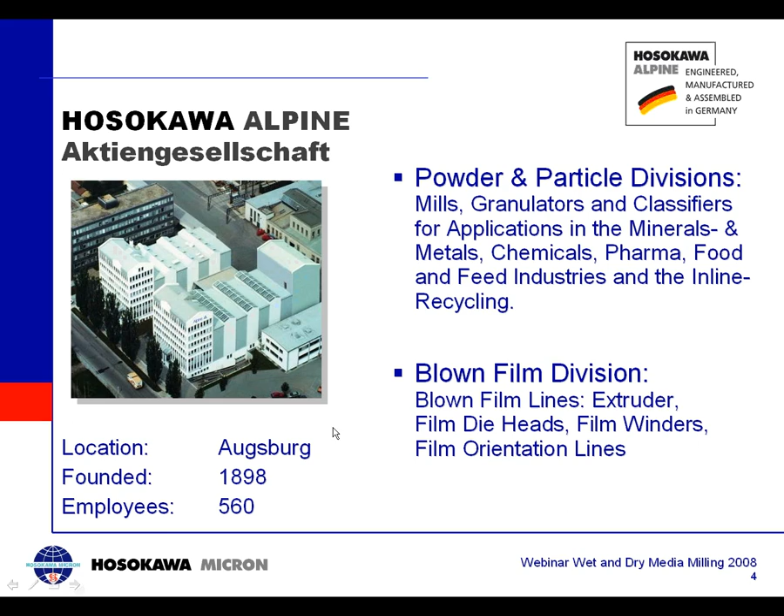Okay, we have it. So during my talk, I will speak about, first of all, the fundamentals of media milling, to give you some theoretical background. I will also talk about the basic types of the media mills. Then I go into the technology of dry and wet media mills. We give you some information about possible applications and the plant technology. And finally, some information about an interesting field, which is submicron grinding with wet and dry media mills.

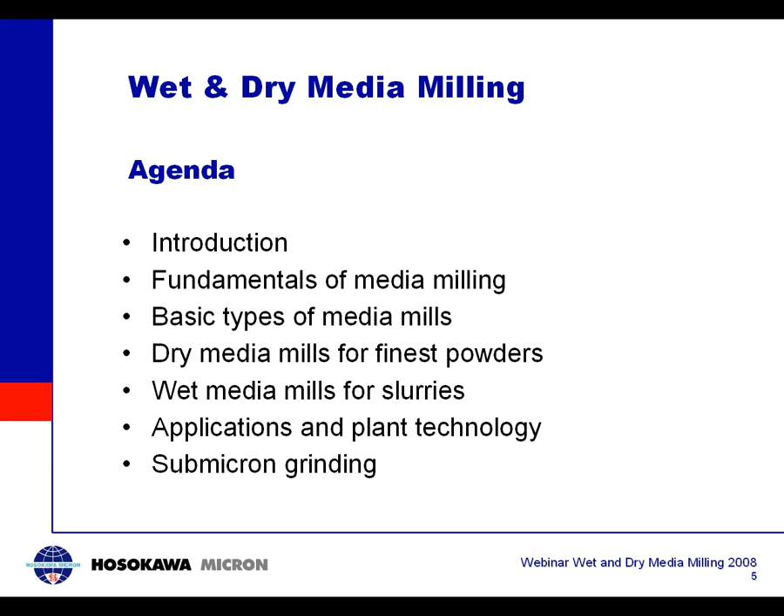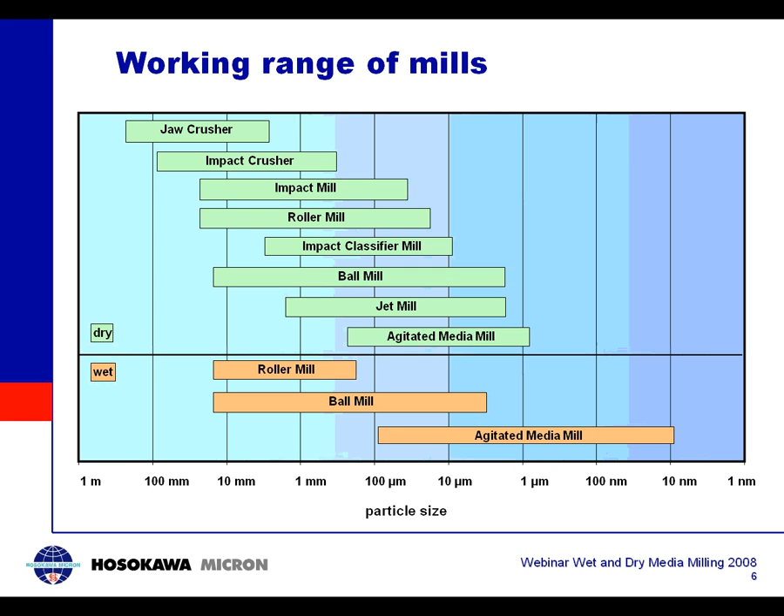The fundamentals of media milling. This is easy to explain, and on the next slide you can see a very simple mill. It's a very early model, about 20,000 years old, but it's a very suitable machine to explain the mechanism of media grinding. You can see here the basic parts of a media mill, which is the grinding medium.

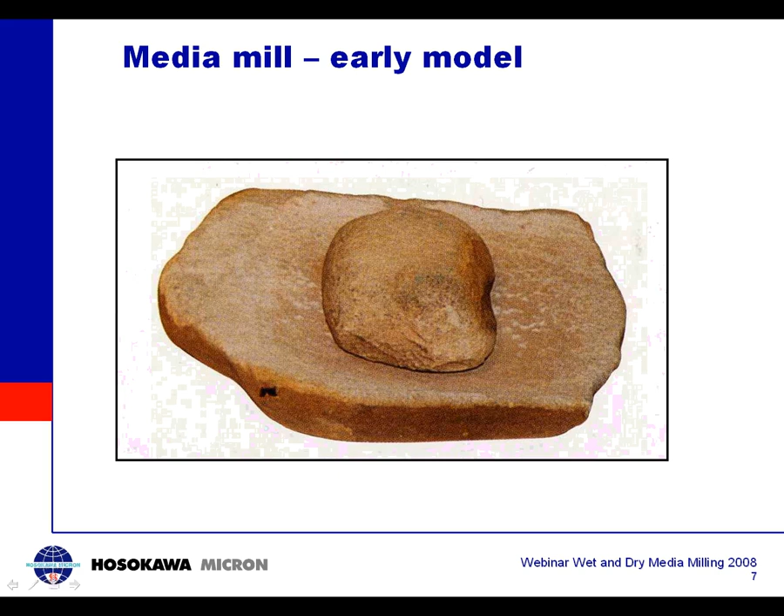It is one only in this mill, and we have a part of the mill, a kind of a support, and in between there is the powder which we want to grind. With this mill, it is very easy to explain the basic grinding mechanisms which can occur in a media mill.

If you take the stone in your hand and you knock on the support, you create a kind of impact on the particles. You can also take the stone and roll it with pressure, and you have a pressure stress on the particles, or you rub the stone on the support, and then you get a shear stressing of the particles. These are the basic types of grinding mechanisms which grinding media can bring over to particles.

And this is the same in modern mills. I think the next slide will show what the difference is and what the similarities are.

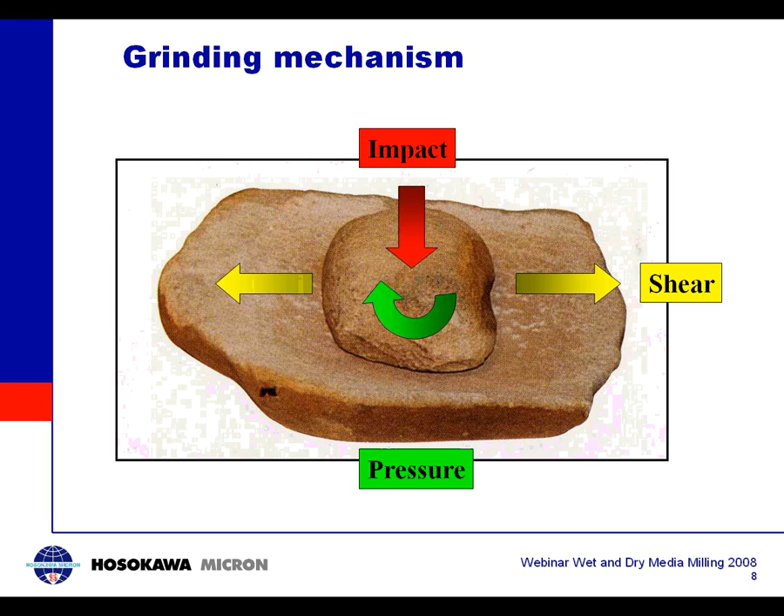We can roll the balls and create pressure, or we can shear the particles between two passing grinding beads. So this is so far the same as in the old mill. However, in the old mill you can take the stone and decide by yourself which grinding mechanism you want to have. This is actually not possible in a modern grinding mill because you have thousands or millions of grinding beads inside, so there will always be a mixture of all these grinding mechanisms in the mill.

There is a certain chance to influence that by setting the parameters of the mill, like the rotor speed or the filling ratio of grinding beads or the material or the size of the grinding beads. But you can only create a tendency to get more impact or more shear on the particles, but you cannot decide to make a single shear stressing in a mill with such a high number of grinding beads.

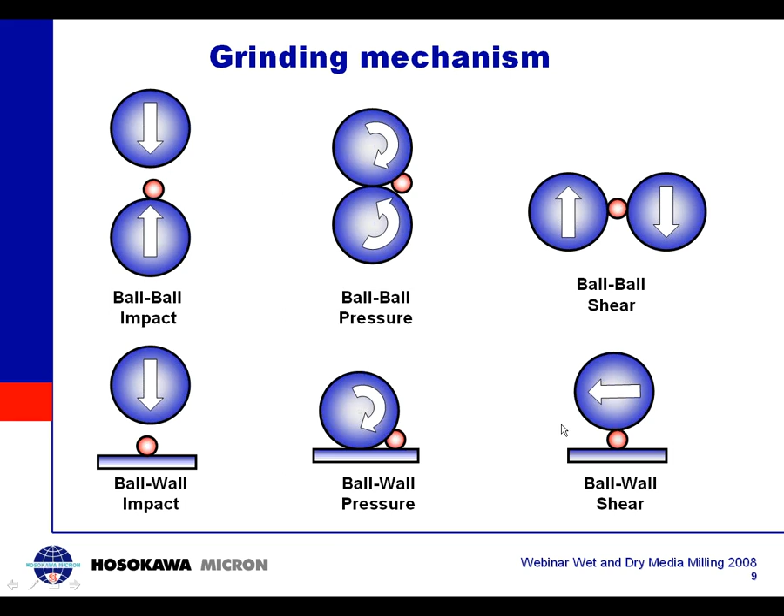First of all, we have a tumbling ball mill, which is a rotating drum in horizontal axis, and the grinding beads are accelerated by the rotation of the drum and falling back, and the grinding energy input is done by the gravity, which is affecting the grinding beads.

If you need more energy input into the mill, you cannot count on the gravity. You have to look for external forces which you can bring into the grinding media, and this can be done in different ways. One is the agitated media mill with a rotor inside, which is rotating and bringing motion into the grinding media filling.

You can also do this by a planetary mill, which has a certain double rotation of the mill and the grinding chambers themselves, and you can simulate a tumbling ball mill grinding under centrifugal forces.

Other types of mills are vibration mills, where the grinding body is moving with a high frequency to transfer the energy into the grinding beads, or centrifugal mills, which are doing basically the same but with a lower frequency to create a kind of a rolling grinding media filling inside.

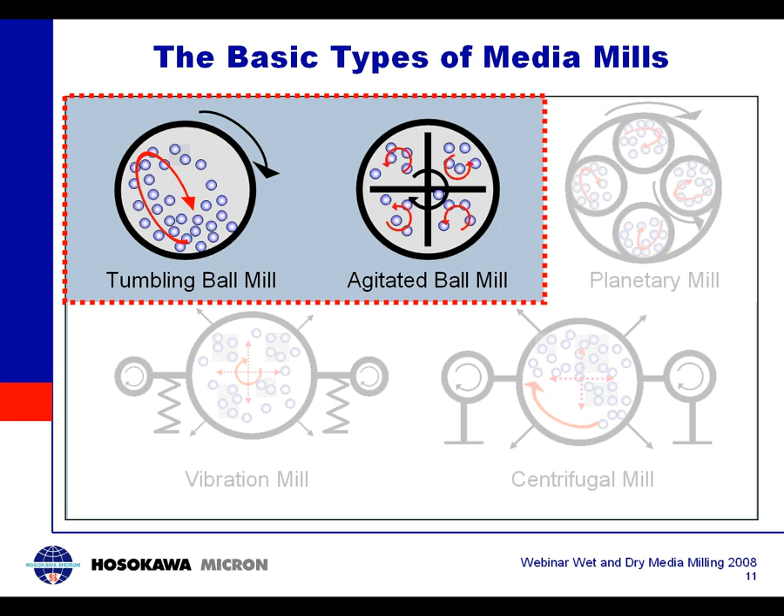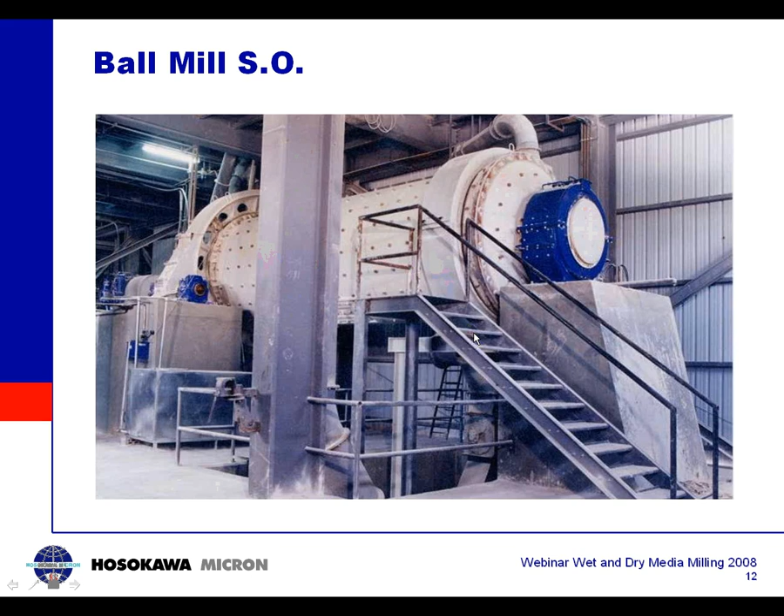These mills are usually operated continuously, but not as a single mill with one pass through the mill, which is definitely not sufficient for very fine grinding. We always have a system with a grinding circuit comprising the mill and the classifiers. I can show you on this flow sheet how this can work.

This is a typical ball mill classifier plant, which we always apply in the minerals industry. The feed material comes from a silo here and is charged into the mill by a dosing unit and passes through the mill in this direction here. The mill contains grinding beads made of steel or ceramic, and the typical size range of the beads is 10 to 60 millimeters. After passing the mill, the material is discharged and conveyed to the classifier.

In this case, we have a typical arrangement with two classifiers, so we can split the material to a coarser classifier, which makes one end product, or to a very fine classifier to make a second product, which is collected in the filter. So this is a plant that can produce in parallel two different products. The coarse fractions from the classifiers are being recycled to the mill and going back into the circuit again.

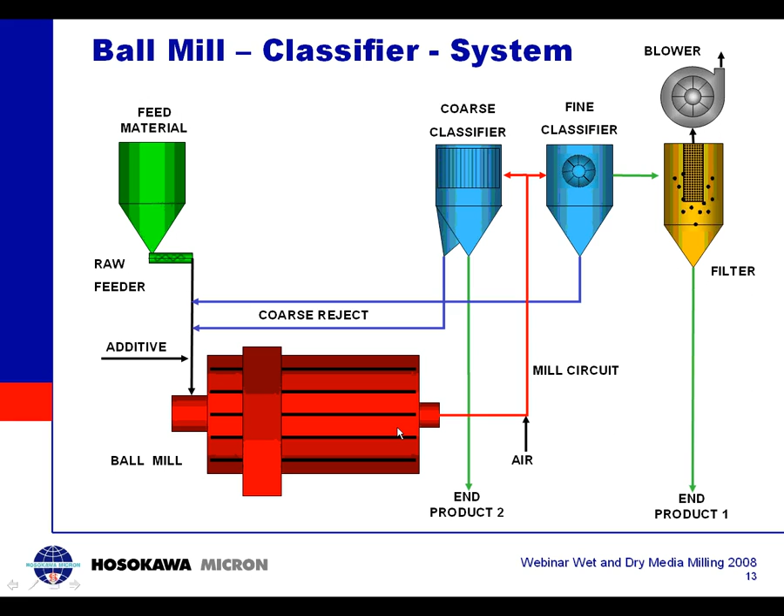Alternatively to the tumbling ball mill, we can also choose agitated media mills to bring higher energy into the grinding chamber. This is a type of mill we are supplying, called ATR. It's a vertical cylindrical grinding body with a vertical shaft and rotating elements. The mill is filled with grinding beads up to the top, and the rotor moves slowly at about 2 to 3 meters per second.

Typical mill volumes are in the range of 80 to 2,000 liters, with power installed reaching up to 315 kilowatt. So the power input we can create with such a mill, 180 kilowatt per cubic meter mill volume, is significantly higher than a tumbling ball mill has.

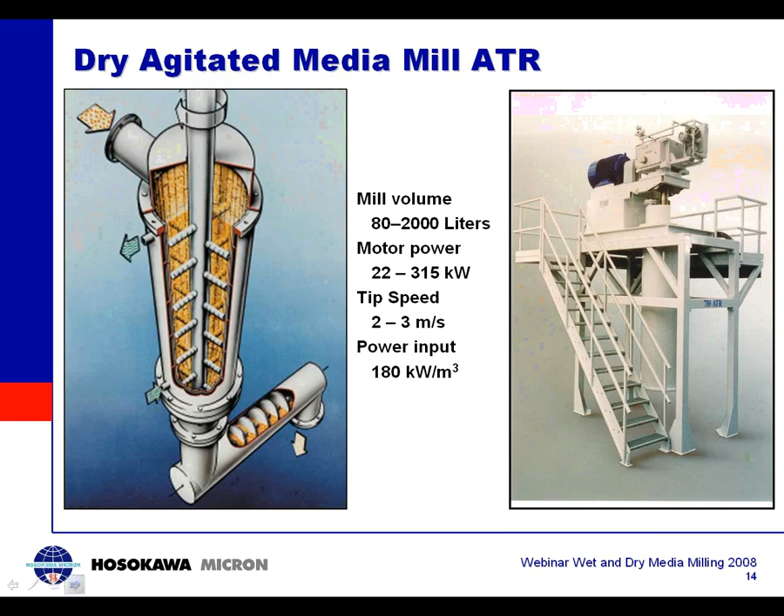These mills are also operated in a closed circuit system with classifiers. I can show you this on the flow sheet. In the center you can see the media mill. The grinding beads and product are fed from the top into the mill, both passing through, being ground, and then discharged by a conveyor screw out from the mill. Beads and product are separated on a vibrating screen. The beads are collected in a special hopper and recirculated into the mill by a bucket elevator. The product passing the screen goes on into a classifier, and the fine product collected in a filter is the end product of the plant, while the coarse fraction is recycled via the bucket elevator back into the mill. So this is also a closed grinding circuit with mill and classifier.

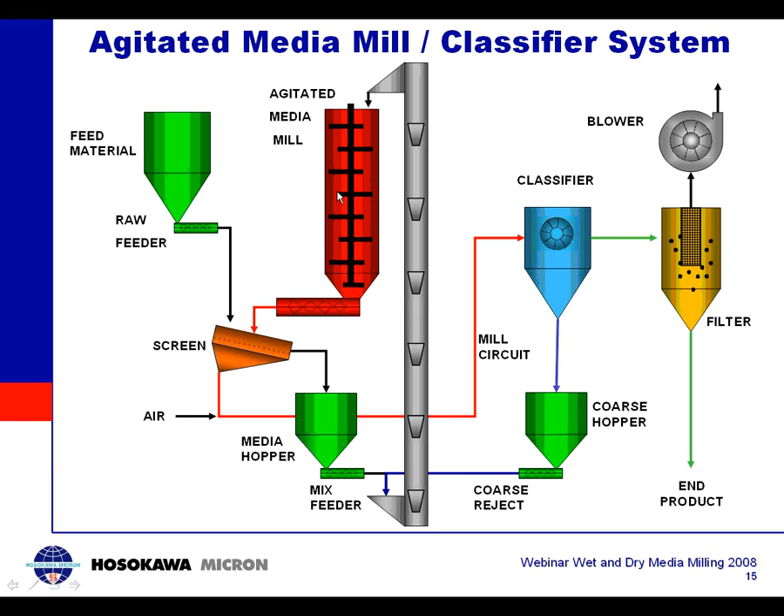To create such an ultrafine grinding system, it is important to have a mill with high energy input that can be operated with small grinding media. However, it is also very important to have an appropriate classifier for the typical end products you want to obtain with this plant. This slide shows a selection of classifiers which we can offer together with such plants for the grinding circuit.

On the left side you see a circuit air classifier, the Ventoplex, dedicated to classifications in the range of 32 to 300 microns, so more on the coarse range of products. We have a spiral flow classifier, ASP Stratoplex, which can do a little finer, designed for high capacities and low pressure loss, so very economic classification. And we have very fine classifiers, the ATP Turboplex classifier or the TTC Turbo Twin, with a special wheel geometry that can go down to 5 or even 2 micron separation cut.

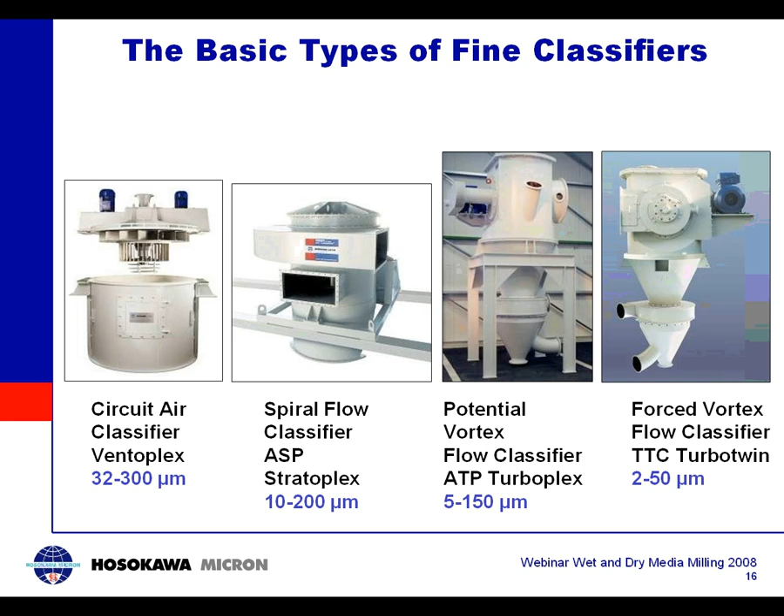Some details of these classifiers can be seen in the next slide. On the left side you see the Turboplex classifier in a special arrangement with multiple wheels, in this case 6 classifier wheels in one classifier housing. With this classifier it is possible to make very fine separations with high capacities. This can be improved further with a new type of wheel, which we call the NG new generation wheel. It has a special blade geometry, creating a forced vortex separation inside, and this classifier wheel can go down to about 3 micron cut size, or in the TTC wheel shown below, down to about 2 micron separation.

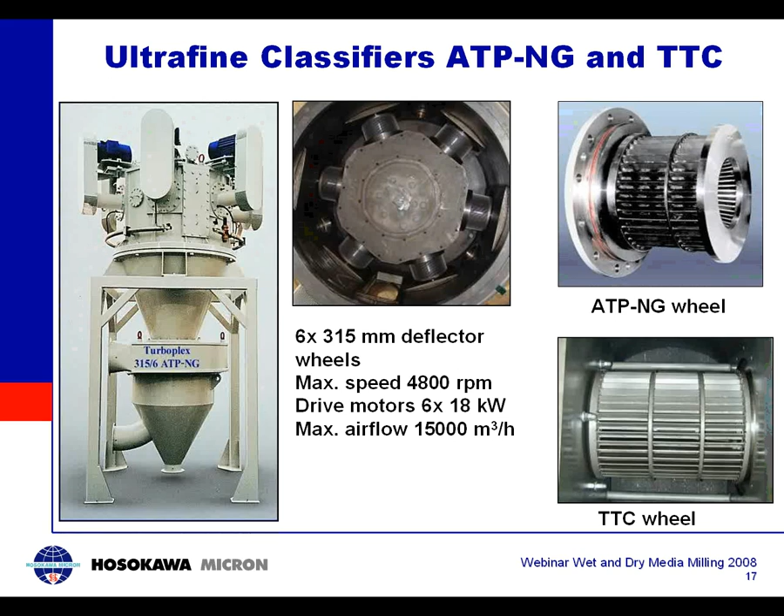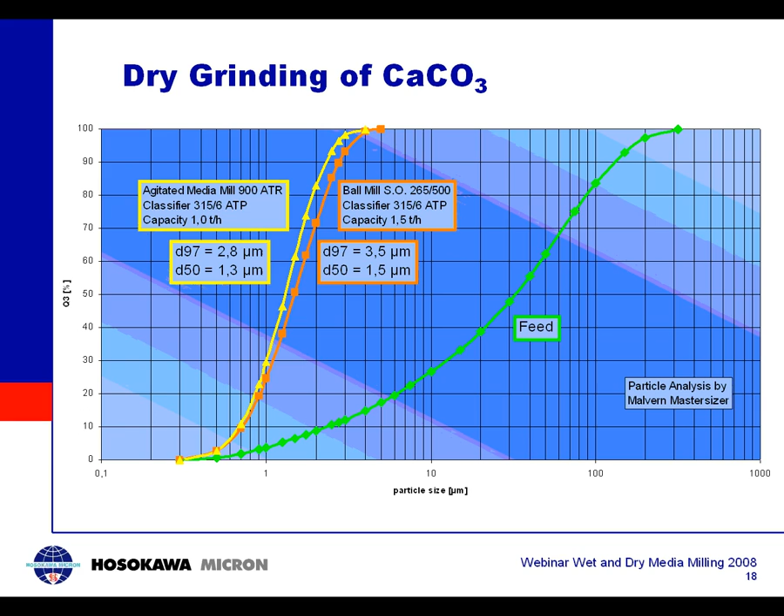The result of such a plant can be seen in the following graph. Green is the feed material, orange is the result of a ball mill classifier system, and the yellow curve shows a product coming from the vertical media mill ATR. What you can see is that we reach the expected grinding limit of about 1 micron D50, and even with a high intensity mill, the vertical media mill, we cannot go significantly finer than the ball mill. So it seems there is a limit of grinding, and I will come back to this problem later when I speak about stabilization of the particles.

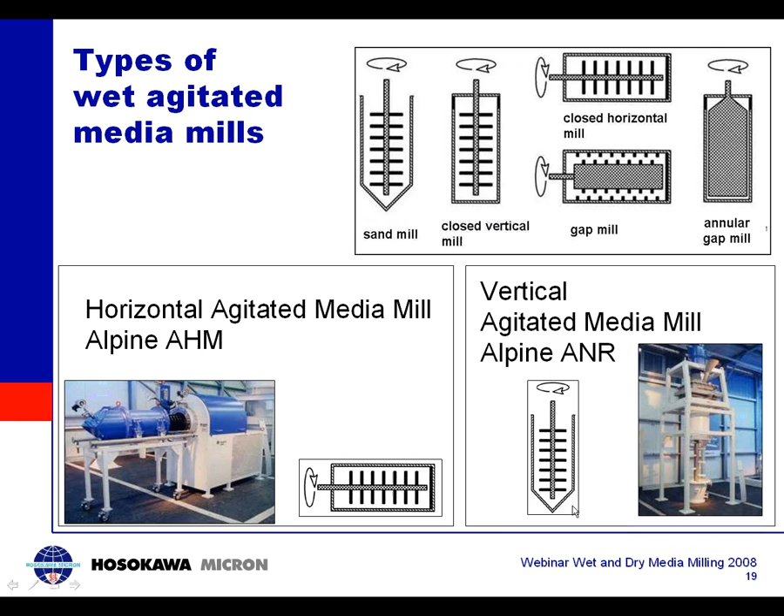We're talking about 2 mills which Alpine is offering in its product line: the universal mill horizontal type Alpine AHM, and the vertical mill ANR, which is an open type with vertical shaft. The ANR, shown on the next slide, is a machine we especially apply for calcium carbonate grinding for the paper industry. The paper industry consumes lots of calcium carbonate slurries in high concentration and high fineness to fill and coat the paper.

So these mills are designed in big scales only. We have mills up to 9,000 liters volume with 1 megawatt drive, and these are typical sizes for the paper industry, which consumes these big amounts of slurry. The mill itself has a cylindrical grinding chamber with a vertical shaft inside. The shaft has agitating elements with wear protection, and the mill is completely filled with grinding media about 1 millimeter in size.

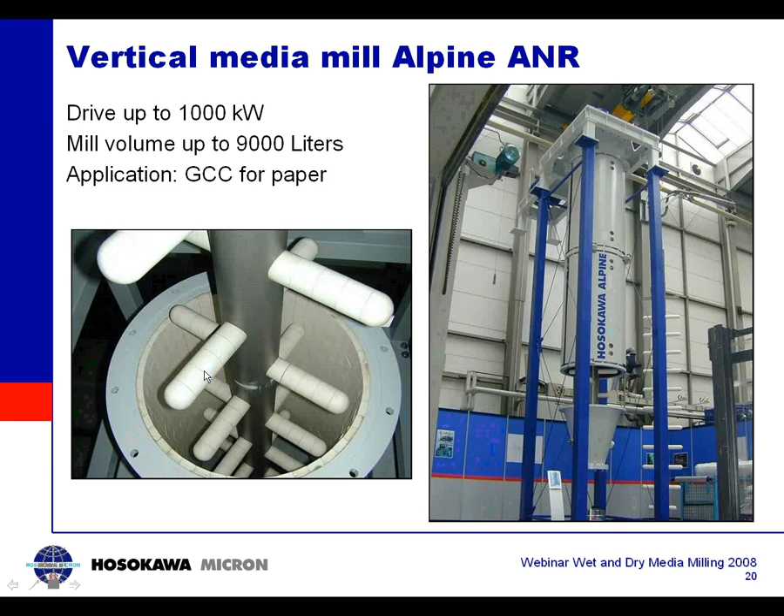On the next slide, you can see an example of a plant and the products we can produce with it. You can see in the photograph this is a plant with 6 mills, each with a 450 kilowatt drive and 5,000 liters of volume. You see three mills in a line and 2 lines in parallel, but this plant can be flexibly connected to make a single, double, or triple pass grinding, depending on the fineness you want to obtain.

The products can be seen on the graph on the left side. We have ground calcium carbonate slurries with a solid concentration between 75 and 78%. The feed particle size is 325 mesh coming from a table roller mill, and is pre-mixed in a slurry, then fine ground to the required fineness or quality, and finally maybe classified if necessary with screens or centrifuges, then stored into big tanks to be supplied directly into the paper factory.

You see the typical finenesses required for the paper industry. It reaches from 60 to 80% below 2 micron in the particle size distribution for typical filler materials, and from 90 to 99% below 2 micron for top coating pigments for the paper.

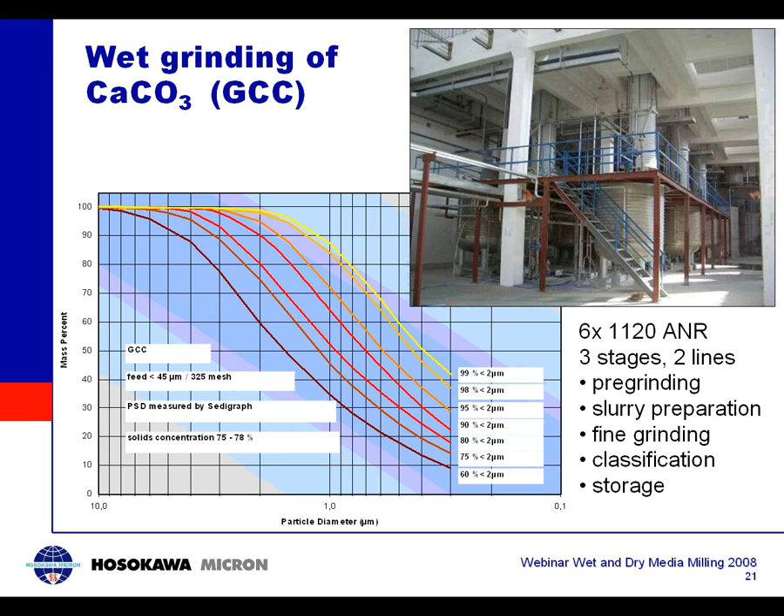The second mill I want to talk about is a very universal mill, which you can nearly apply for any product you want to grind in a slurry. It is the horizontal media mill AHM, and this mill is very flexible in size. We have a product line reaching from a very small machine called Picoliq with 7 milliliter smallest grinding volume for research applications.

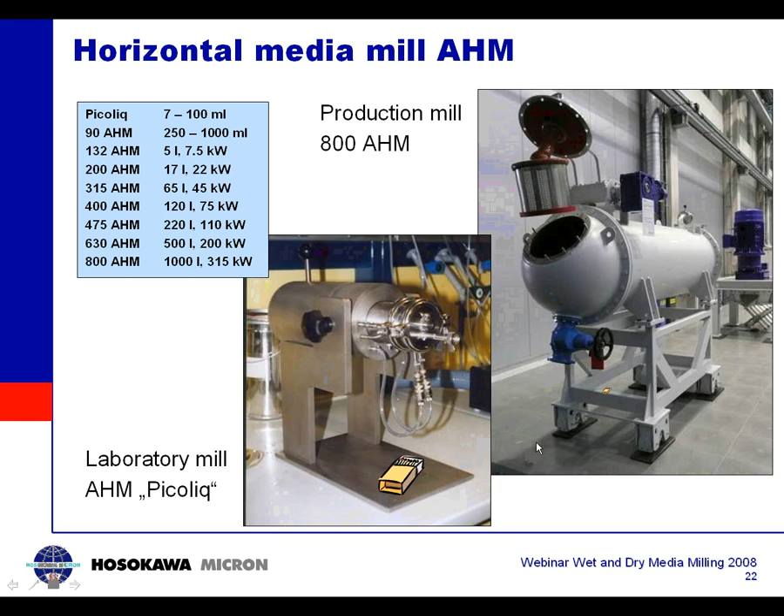You can use it for about half a gram or 1 gram of material to grind, particularly for the pharmaceutical industry. The line then reaches up, passing a lab mill, some pilot scales, going up to production machines which can have 1,000 liters volume and 315 kilowatts. You can see the smallest and the biggest machine here in these photos. The matchbox will give an imagination of the size we talk about.

On the next slide you can see some technical features of this mill. First of all, you can see a dynamic bead separator on the rotor and a very fine screen which separates the grinding beads from the slurry when leaving the machine. This has a direct dynamical relief, meaning the machine is suitable to run grinding beads down to a very small size, which is necessary if you want to make nano grinding.

The screen can be exchanged and serviced very easily. The mill can be opened without emptying the grinding beads, so servicing the screen takes only a few minutes.

Another feature is the flexible wear protection system. You can see here some examples. This is a mill completely lined with zirconium dioxide ceramics and some wear parts made of polyurethane, steel, and another type of ceramic. The machine is a kit system, and you can change the rotor and stator parts made from these materials: polyurethane for water-based slurries, some metal materials, different ceramic materials, and even plastic materials are applicable to this machine.

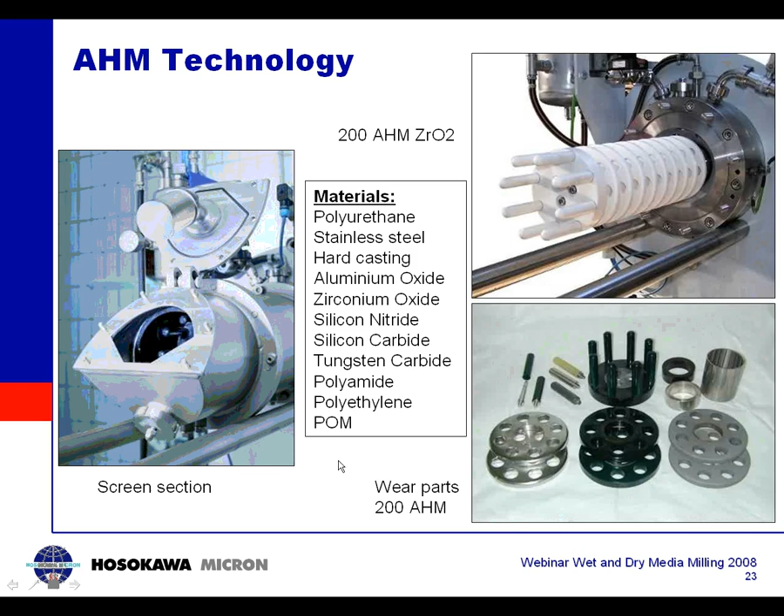In the following slides I show you some applications of the horizontal media mill. This is an example of a small plant which can grind high quality zirconium dioxide for electronic applications. You see that we are making a product with a D50 around 500 nanometers, a very typical size for standard media grinding. The plant comprises two mills, which you can operate in parallel for high capacities or in a serial connection. For high fineness, it's even possible to put different grinding media sizes into the machine to optimize grinding for very fine particle sizes.

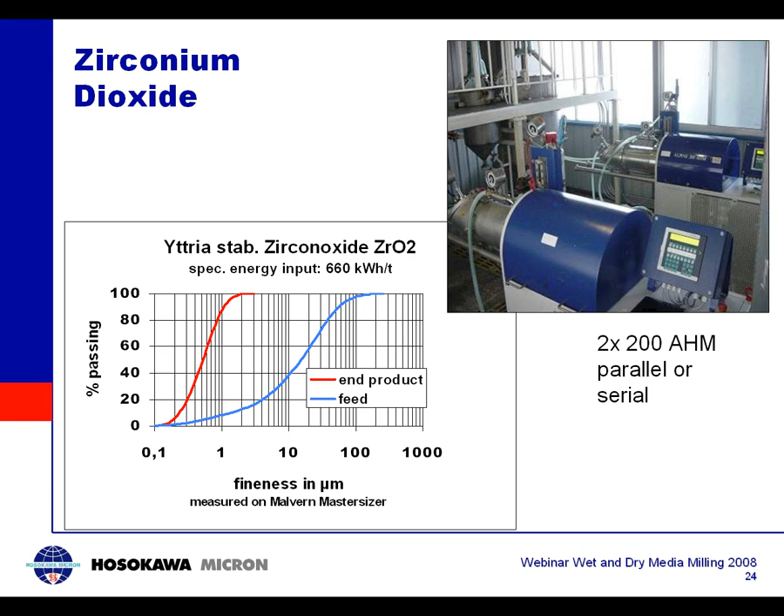The next slide shows a small plant for titanium dioxide processing. You can see that we're reaching down to about 300 nanometers particle size. But actually this is not a real grinding, it's a dispersion of agglomerates. Titanium dioxide in this particle size distribution consists only of agglomerated primary particles, and by circuit grinding we can obtain the primary particle size of this product.

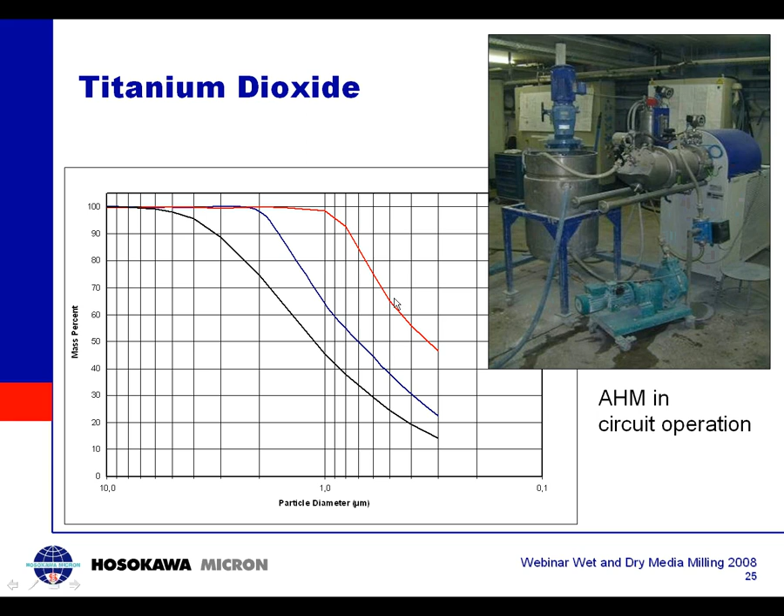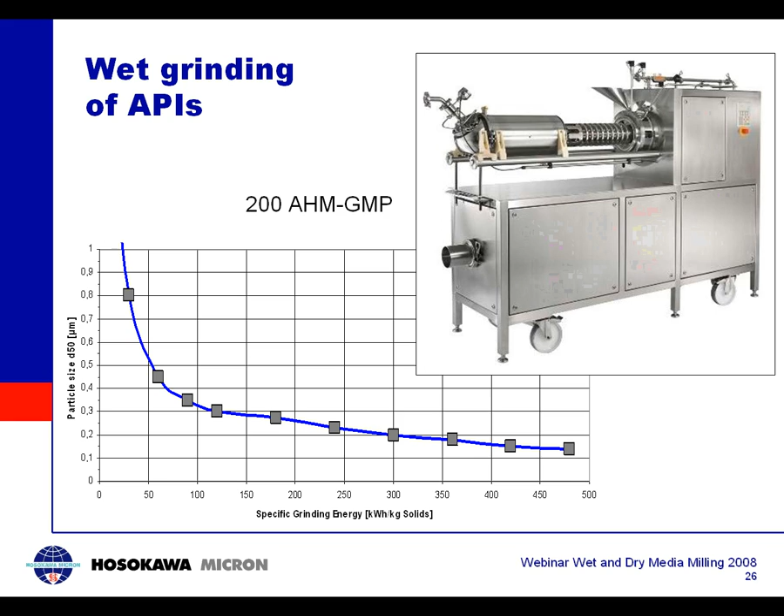On the graph here you can see an example for grinding of an active ingredient, starting at maybe a 10 micron size and reaching finally down to a nano size of about 150 nanometers. These particle sizes are very important for insoluble active ingredients which are dispersed in a liquid, to increase the bioavailability of these ingredients.

Finally, on the next slide, we have an application for real nano grinding. This is an example to grind aluminium oxide in water. We have used a 90 AHM plant, which is a complete plug-and-play system. Everything needed is integrated in this rolling box here. We have a pump, an agitator with a cooling tank, a pressure liquid system for the shaft seal, and the mill itself, which is a 1 liter mill for lab applications.

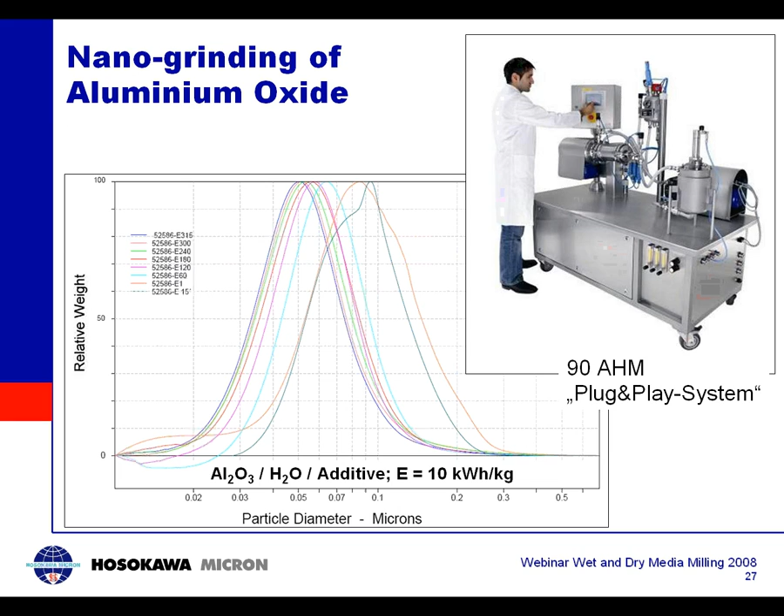What you can see here is that we have made a real grinding of aluminium oxide particles, reaching finally down to a particle size of 50 nanometers D50. But to be honest, this is not just grinding - it is a special recipe of the slurry, containing stabilizers and surfactants, to manage the agglomeration and stabilization of the fine particles. I will come back to this topic a few slides later.

But before I speak about stabilizers, I want to give some information about the grinding media, because it is not the mill, not the media mill, who is making the grinding. It is actually the grinding beads which have contact with the particles, and the grinding media are the tool to grind. So it is extremely important to choose the grinding media in the right manner.

I have listed here some properties, some criteria for the grinding media. First of all, we have to select the right size. Grinding media for agitated media mills are available from 50 micron to 3 millimeter size approximately, maybe up to 10 millimeter for special mills. We have to look first at the feed particle size, to be sure the grinding media are not too small to obtain a grinding effect on the big feed material. We also have to look at the required end fineness, and for very fine materials we need a high number of very small grinding media. So it's important to find the right grinding media size in respect to both of these particle sizes.

We also have properties like hardness and strengthness, and so on, which influence the selection of the beads. Finally, we have to look at the contamination, because media milling always creates abrasion, which goes from the mill into the product. This contaminates the product and reduces the lifetime of the mill and the grinding media. So it's also very important to choose the right material for the beads, which can be metal material, glass, different ceramic materials, or plastic materials.

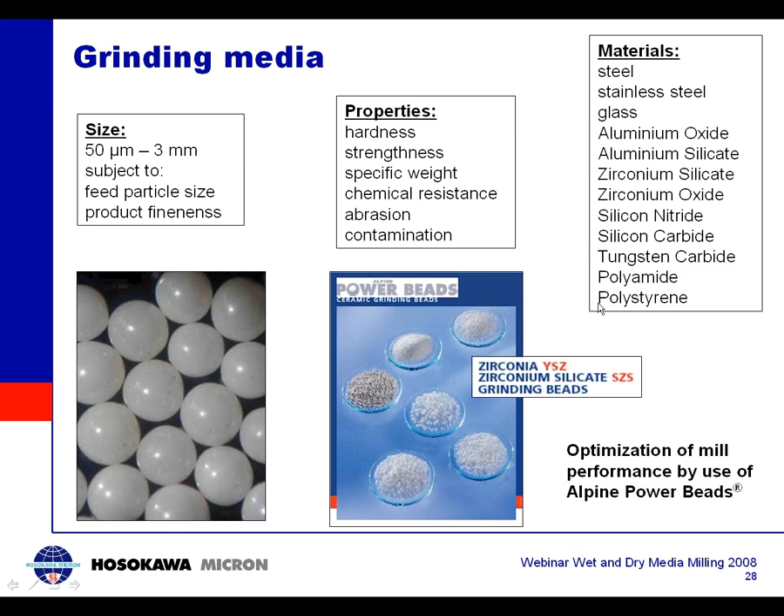To optimize the performance of our mill, you can also purchase very specified grinding media, which are called power beads, and we supply them together with our mills.

Are determining the grinding effect. The stress intensity is more or less the kinetic energy of the grinding beads, and has just to be sufficient to crush the particle, not too much and not too less. The stress number indicates the number of stress events during grinding which is effected on a particle. For very small nanoparticles or submicron particles, it's very important to have a high stress number. Finally, the grinding energy is calculated from the product of stress number and stress intensity. This is a means to calculate and optimize a grinding media mill.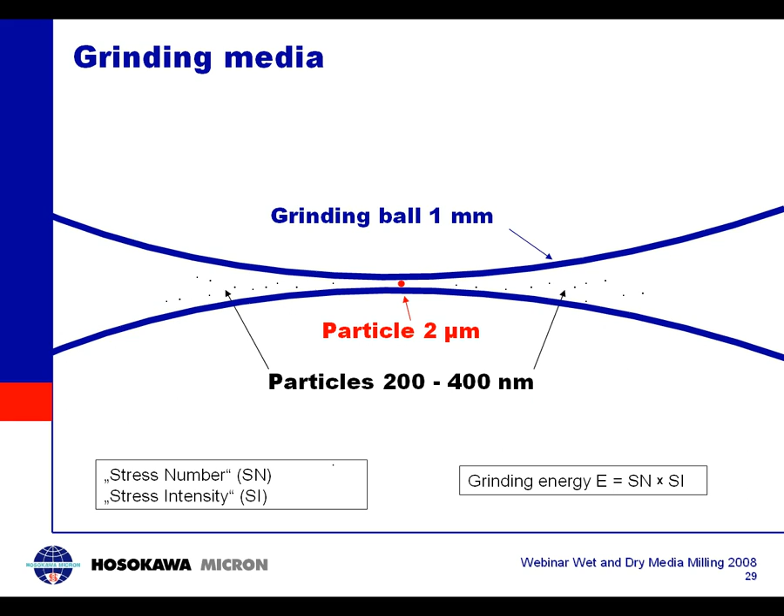But another means to influence the particle size distribution is the mode of operation of the mills, which is shown on the next slide.

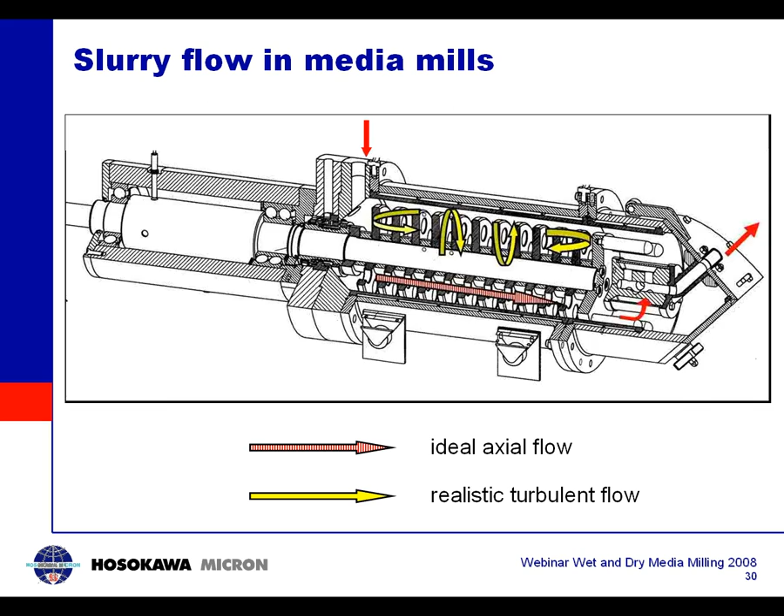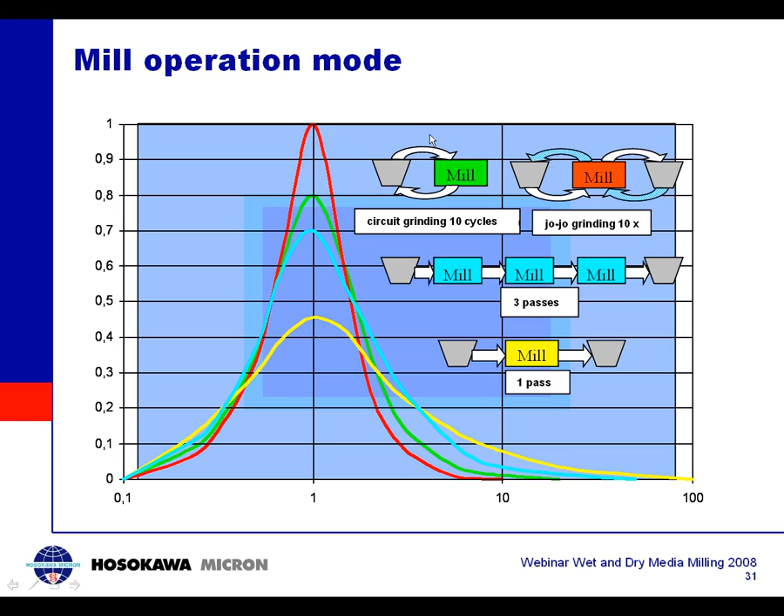Some people make life easier with a simple circuit grinding. They take the same mill size and run the material just in a circuit with 1 tank and 1 agitator. The resulting curve is the green one, which is still a steep particle size distribution, not as good as the red one, but sufficient. The effect comes from the mixing statistics of the tank, which also has an influence on the residence time in the mill. But this is a very easy process which can be applied to many production plants.

So far the milling technology. I would like now to talk about this supposed grinding limit, which I mentioned some slides before. There was dry milling, and a dry milling example which ended up around 1 micron.

The other thing that can happen—this is valid for dry and wet grinding—for dry grinding, an additional effect occurs where the grinding media become coated with sticking particles, forming a layer around the grinding media. So the grinding forces between the particles are blocked, and real efficient grinding can no longer occur. But there are means to do something against it.

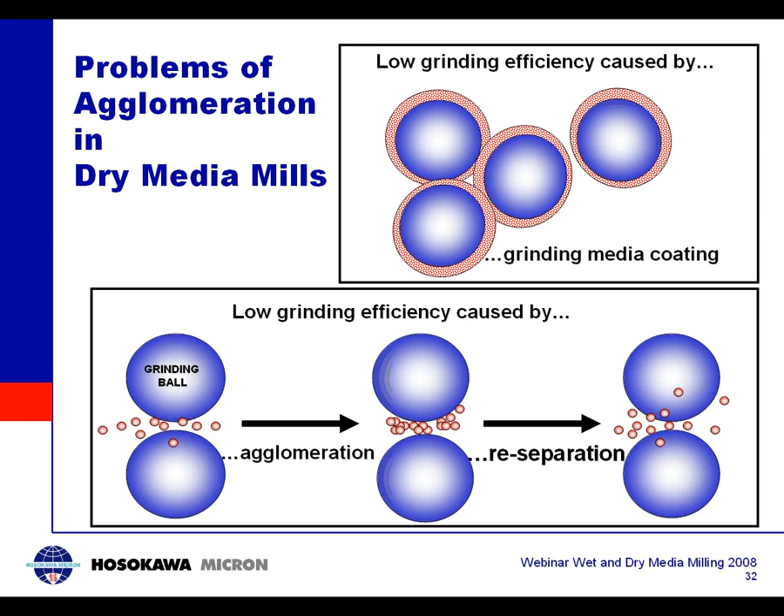So we have to try to influence the particle interactions. We try to influence the surface properties of the particles, which is shown in the next slide. If we put some additives, some grinding aid into the powder, which influences the charges on the surface or other things, then it is possible to shift the particle size distribution away from the 1 micron grinding limit into the submicron range.

So this is still R&D work which we are doing. It is not state-of-the-art. There are some industrial processes, for example calcium carbonate grinding, where we already use some grinding aids to influence the agglomeration behavior of the powder, but we cannot yet obtain such fine particle size distributions in an industrial dry milling process.

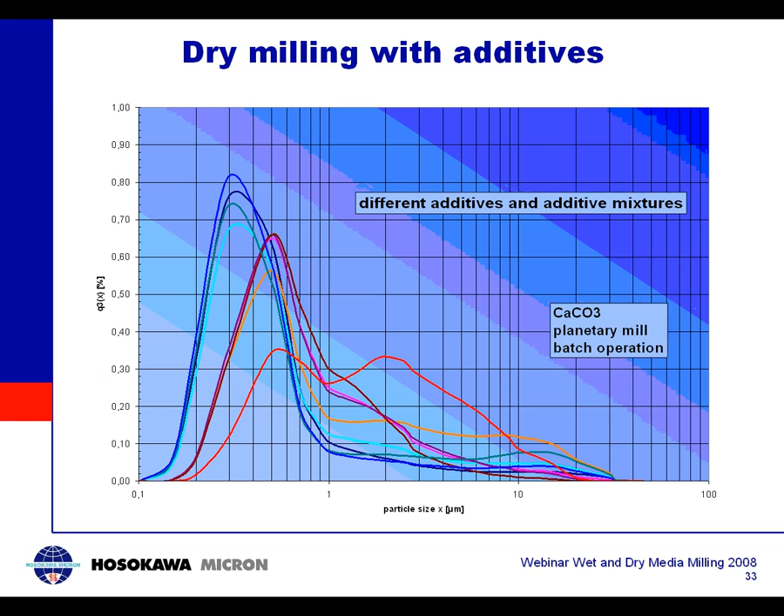This is different to wet milling. We are many steps further in wet milling, and on the next slide I can show you the mechanisms of stabilization which we can use in wet milling. There are three different mechanisms which we find.

One is the electrostatic stabilization. This is creating a charged layer around the particles, and if two particles have the same charge, the attracting forces are blocked and the particles cannot agglomerate anymore.

We can alternatively do a steric stabilization where we put some long chain molecules on the surface of the particles, and the long chains keep the particles apart from each other, mechanically, so they also cannot approach each other because they are blocked by the long chains of the additive molecules.

It's also possible to combine electrostatic and steric stabilization and get electrosteric stabilization, where we have some molecules with charged groups at the end, and the charges additionally help to keep the distance between these particles.

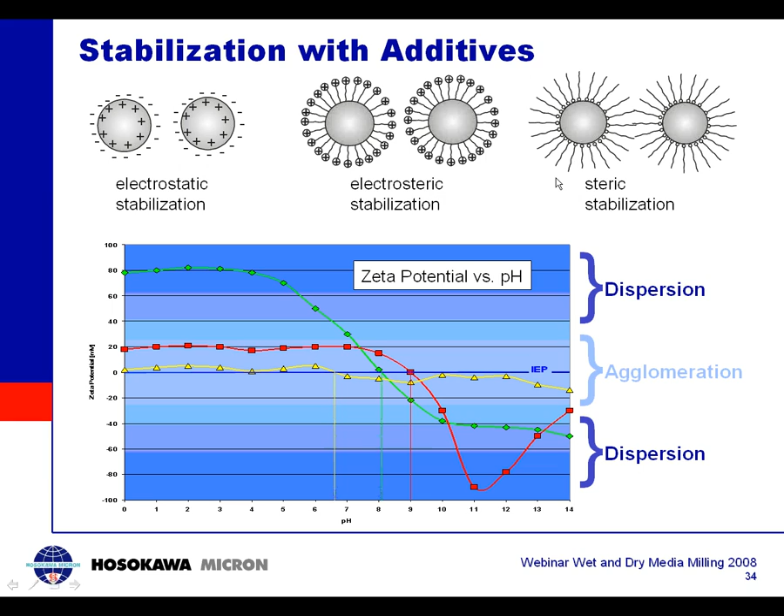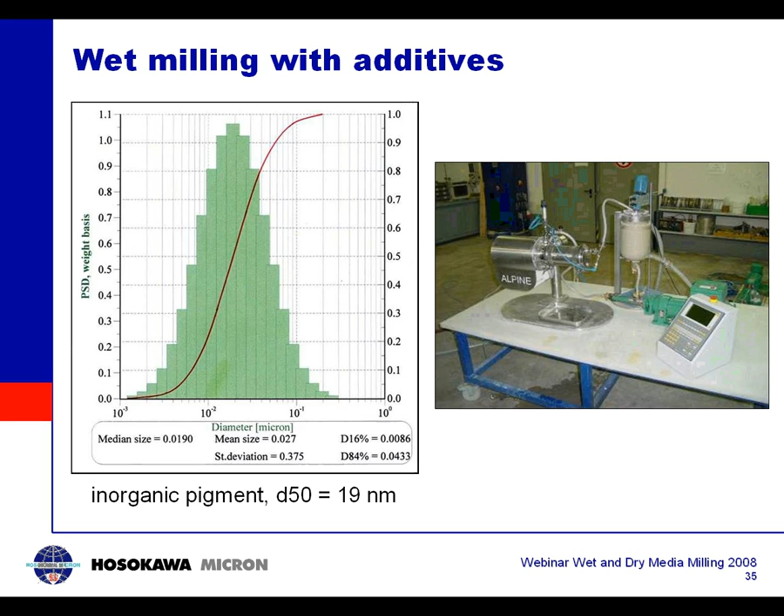This is the trick to come to nanoparticles, and with this example I can show how successful and how easy this can be. This is a standard grinding system with a horizontal agitated mill, just a circuit grinding with pump, tank and mill, and we have ground an inorganic pigment which finally reached down to an average particle size of 19 nanometers, just by electrostatic stabilization, by shifting the pH value to the appropriate zeta potential.

This brings me to a certain conclusion. We can identify three important tools to obtain ultrafine milling, meaning bringing media milling into the submicron range, or even into the nano range. This is valid for dry and wet grinding.

We find that media mills, dry or wet, are the suitable machines to bring in the necessary energy and impact events to get a very fine or ultrafine milling.

We have to choose the right media. Especially the media size is very important, and for nano grinding we go down to 50 micron or 100 micron beads to make this economical in a short time. We also need high performance material for the grinding media to avoid contamination of the product.

And finally, the most important thing: we have to choose the right additives to influence the surface activity and surface interactions of the particles, to avoid the agglomeration and to stabilize the fine ground particles.

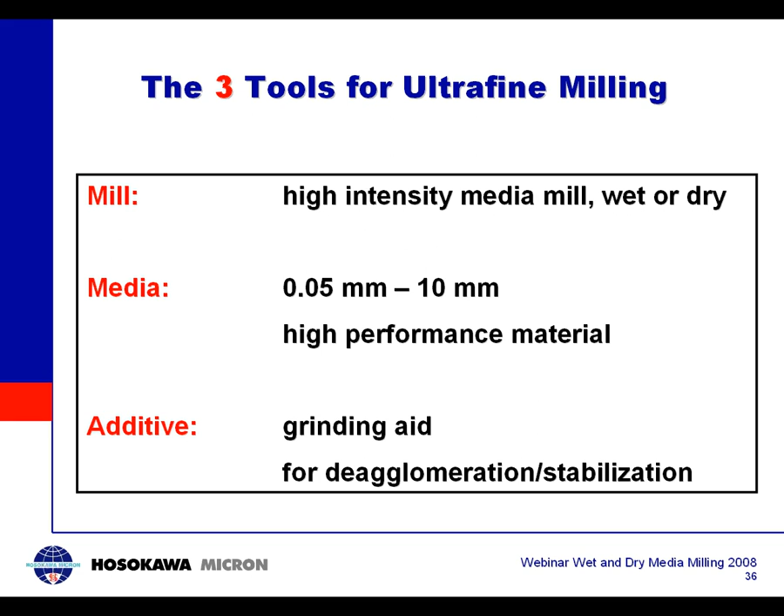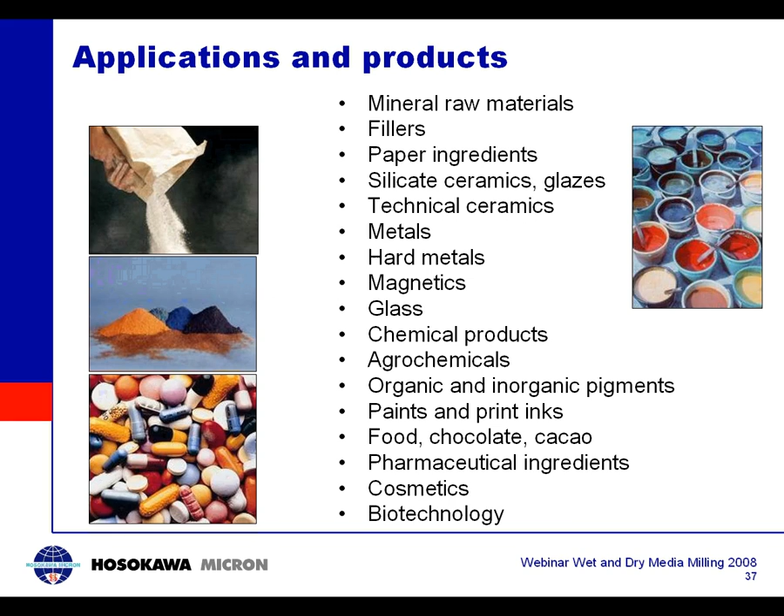In the next slide I can show you some field of application. It just gives you a survey of the versatile applications for media mills for ultrafine grinding, and you can see nearly any industry can have a benefit in this. Yeah, and this is the end of my presentation.

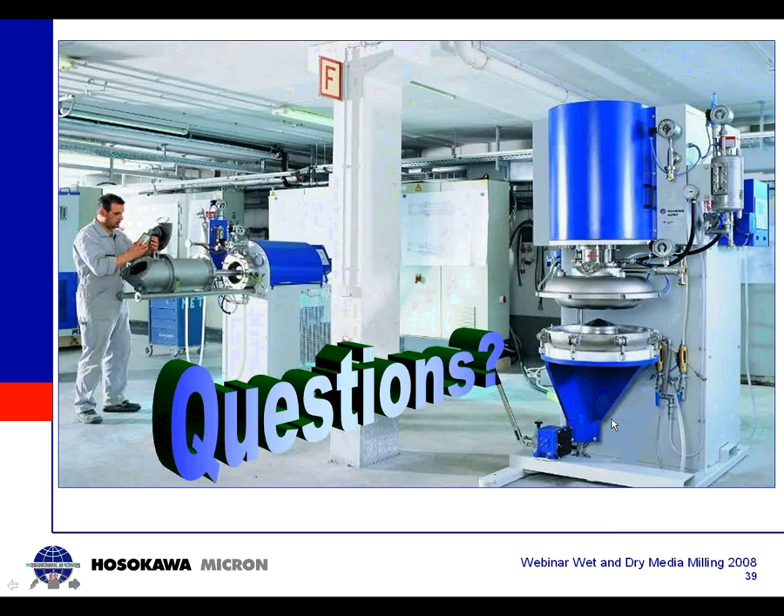One of the questions that showed up, Dr. Stein, is basically what's the energy consumption for the different wet ground GCC qualities?

That depends on the fineness we want to have, and this starts on the low end for a coarse filler material with 60% below 2 micron. The energy consumption is around 35 kilowatt hours per ton related to dry solids, and it is reaching up for the D99, for 99% below 2 micron material, which is around 200 kilowatt hours per ton.

I'm transferring some of the questions to Dr. Stein for him to pick through the ones that would have the most generic appeal. One question I have here, Dr. Stein, as you look through the rest of them, is: is a continuous dosing of additives needed during the wet nano milling process? Sorry, I didn't get that, could you repeat? Sure - is a continuous dosing of additives needed during a wet nano milling process?

It is, yes. We always have to control a constant pH value or a constant conductivity in the material, and we always have to keep the optimum conditions for the stabilization. So it is needed to dose the additives constantly, and it's needed to control some properties of the slurry to have an image of what we have to do. This can be done by measuring viscosity, measuring conductivity or pH value, or even measuring the particle size directly in line.